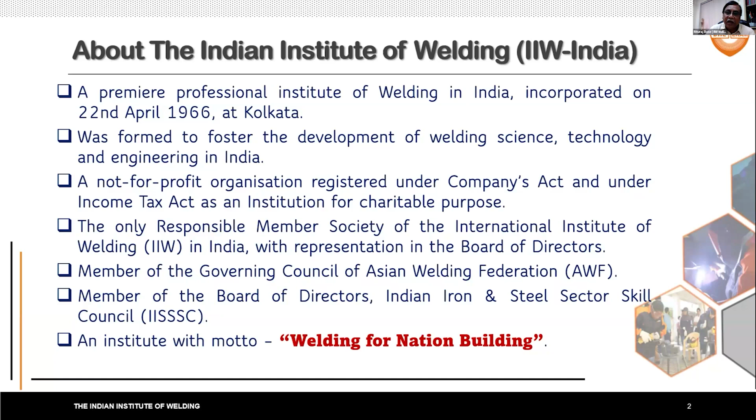This is my topic today. Before going into detail, I just want to say a few words about the Indian Institute of Welding. It's a premier professional institute incorporated in 1966 and formed to foster the development of welding science, technology, and engineering in India, a non-profit organization, and the only member society of the International Institute of Welding in India, with representation in the board of directors, member of the governing council of Asian Welding Federation, member of the board of directors, Indian Iron & Steel Sector Skill Council, etc. And our motto is welding for nation building.

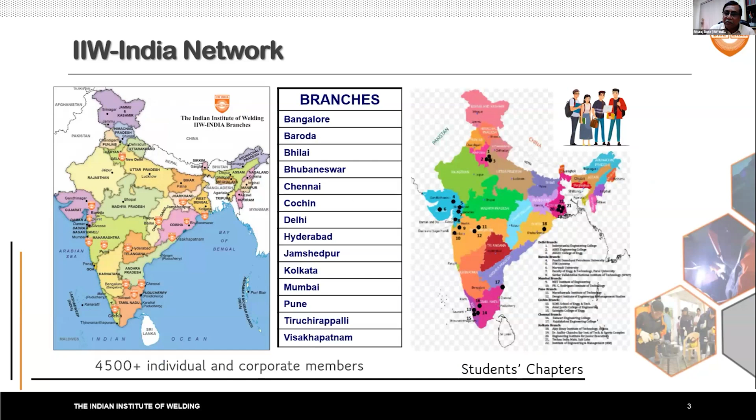Over the last 50 years, there has been a paradigm change in the welding industry. Welding technology has undergone a phenomenal change because of the efforts made in global exchange of information and research. These changes have led to adoption of higher productivity processes with consistent quality, safety, improvement of work environment, and have also contributed to raising welding technology to the level where it is today. You have seen the presentation by Mr. Shah just before, and you can understand where we are today. However, our environment is still under severe risk through welding activities, including global warming. So let us have a look at the main hazards from welding which affect our environment most.

Before that, I just want to inform. As an institute, we don't manufacture anything, but we have several curriculums for inspectors, engineers, welders, etc. And now we are focusing on our environment also. That's why our last international congress in January this year was on the theme of sustainable and green welding.

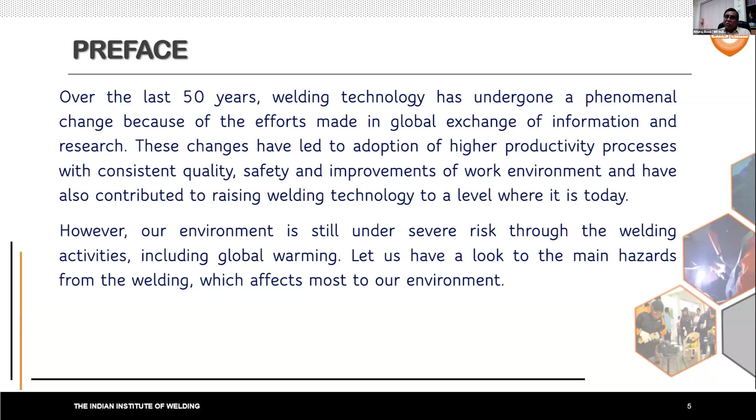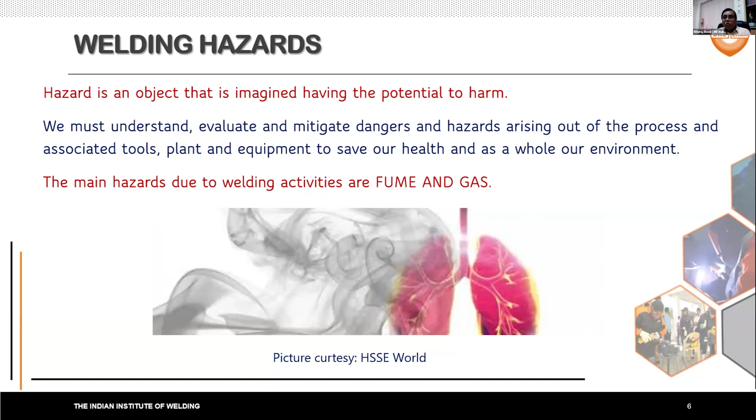Now, welding hazards: we must understand, evaluate, and mitigate dangers and hazards arising out of the process and associated tools. The main hazards due to welding activities are fume and gas. I think people know this one. And this is when we are welding in the normal, conventional way. These types of gases and fumes are easily visible, and you can see the fume particles. I just want to show you.

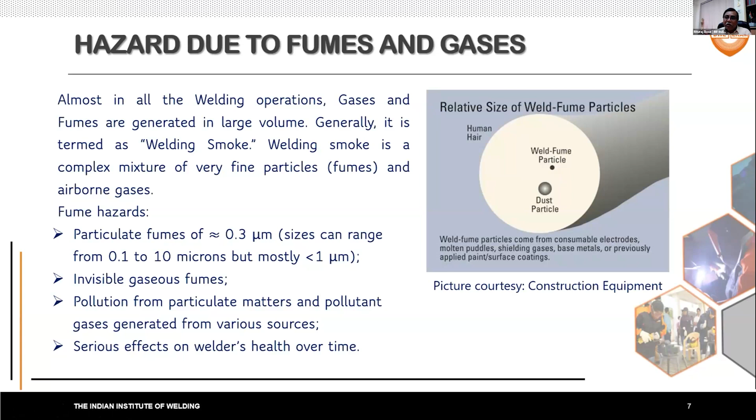You can see in this picture, if this round is our hair, this small one is the weld fume particle. It is within 0.1 to 10 microns. When welding is going on, the fumes generated are called welding smoke. You can understand how tiny this is, and it goes into our lungs and everywhere. So how dangerous this can be.

What are the sources? It can be from the parent metal, metallic fumes generated by heating, oxides formed by heat from cutting, surface treatment, chemical cleaning of surfaces, degreasing chemicals, anti-spatter sprays, surface coatings, galvanizing and other metallic coatings, paints, plastic coatings, surrounding air, formation of ozone, nitrogen oxides, carbon monoxide, other oxides, depending upon so many things.

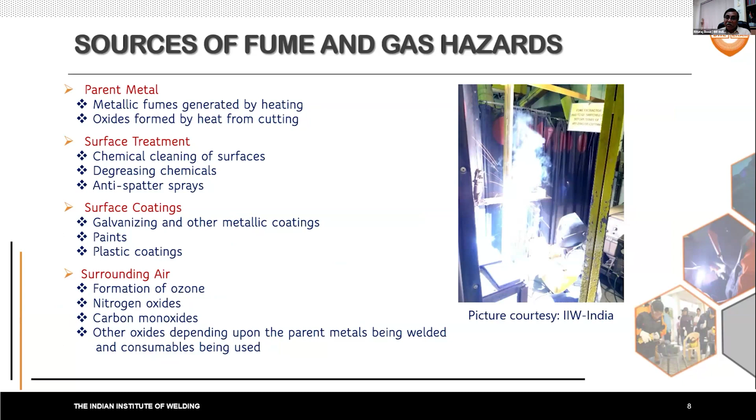And then shielding gases: carbon dioxide splits into carbon monoxide, higher level exposure of inert gas based mixtures, and lack of oxygen; continuous leakage of these gases in a covered atmosphere can put welders' lives at risk. And consumables: SMAW flux coatings, copper fumes from GMAW wires, welding fluxes. All these cause fume and gas hazards, and this always affects our environment.

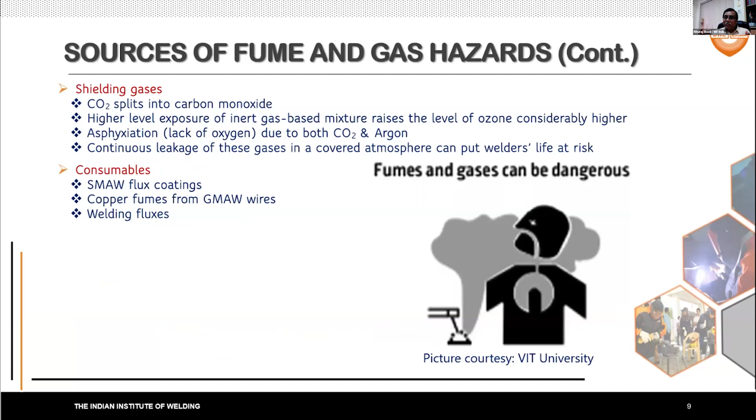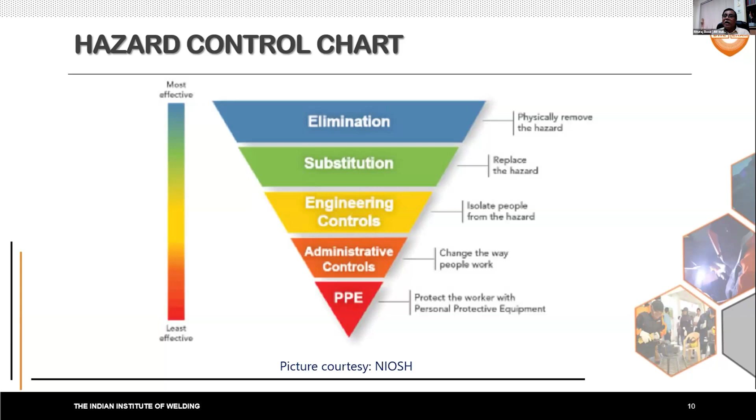Then engineering control, isolate people from the hazard. They have to design in such a way that people can be isolated from the hazards. Then substitution, where possible, replace the hazards. And finally, most effective is elimination, physically removing the hazard. The way forward is green welding, or green revolution is the only way.

So what is green welding? Welding through environment-friendly processes is called green welding in general. Different welding techniques generate different amounts and kinds of pollutants, so selection of technique has an influence on environmental impact. Two solid-state welding techniques, friction stir welding and magnetic pulse welding, create less pollution because they eliminate the need for fillers or flux and do not produce dangerous fumes.

Another solid-state technique, diffusion welding, also eliminates outgassing, but it is impractical for larger jobs. Also, magnetic pulse welding is not for larger jobs. And while talking about arc welding, we should see the possibility to use submerged arc welding to a great extent, through which production will be faster with negligible fume and gas, though positional constraints are there. That means submerged arc welding can only be done in the flat position.

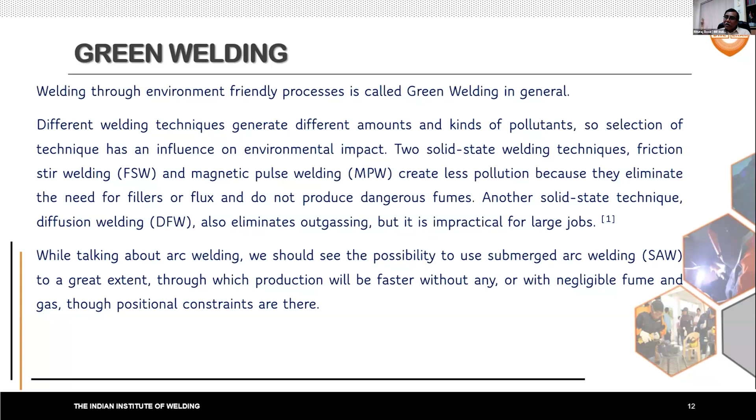Now friction stir welding is considered to be the most environment friendly and is a green technology due to its energy efficiency with high performance welding. Indeed, it's a green process that does not emit smoke or other projections and does not produce any noise, as it does not require any preparation of the surface to be welded. It does not involve any prior stripping either.

But there are constraints: it cannot be used in project sites, only in the laboratory or shop floor. But wherever possible, we have to try to use this, though it is very costly, of course. Moreover, the main advantage of friction stir welding is that it's a cold welding. More exactly, in a pasty state, the weld is made only by mechanical deformation through friction, and the bonding takes place before the metals reach their respective melting points.

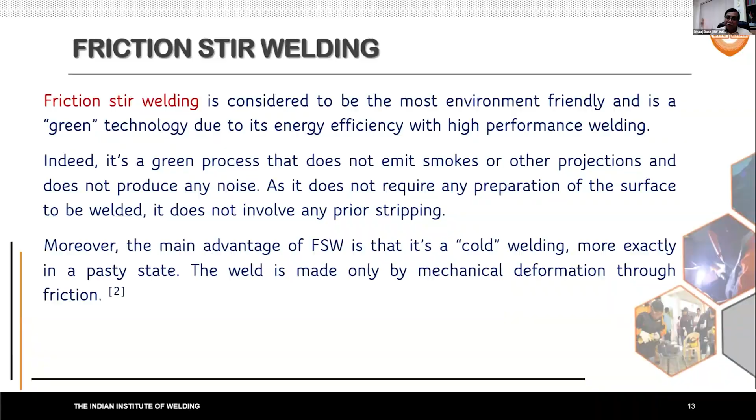Just a small video on friction stir welding.

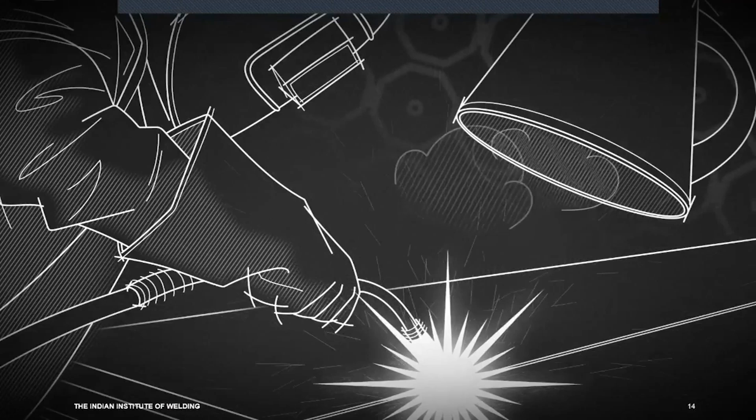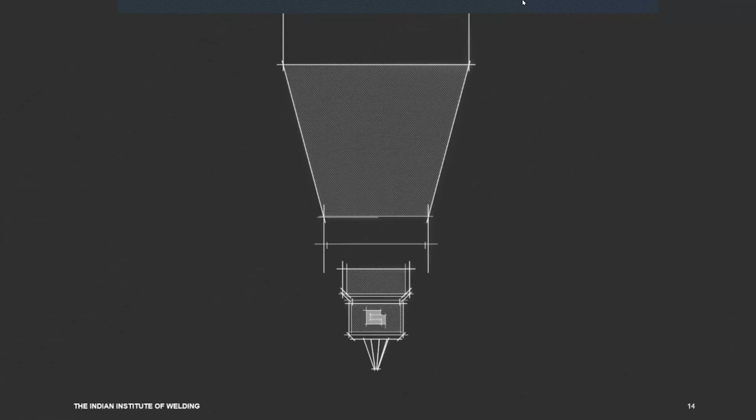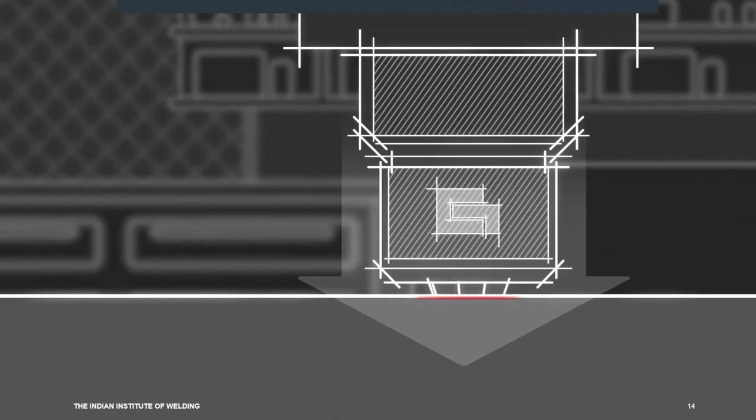Friction stir welding. How does it work? Usually during welding, sparks, smoke, and extreme heat are to be expected. Usually. But is there a welding procedure that can operate without all of that? Yes, friction stir welding. But how does it work? Friction stir welding is the optimal process for materials of the future, such as aluminum, copper, and magnesium. It joins the materials without melting. Friction stir welding aims to perfectly join two workpieces. The metals are not melted. Instead, they are stirred. In other words, mixed. In addition to stirring, friction plays an important role. This tool enables the friction. The rotating pin is pressed into the workpiece. Frictional heat is generated through pressure and rotation. Due to the heat, the material becomes deformed, even without reaching the melting point. By moving forward along the welding path, the rotating tool stirs both materials. Thus, a discrete and extremely strong joint is created. With this innovative technology, parts that are fit for the future can be produced. Light, strong, and of high quality.

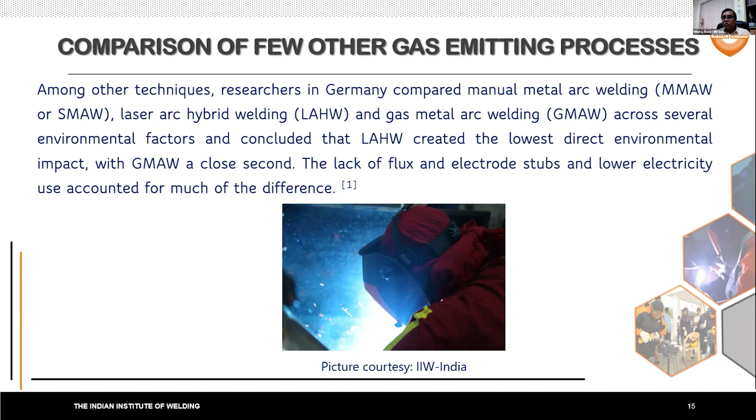Friction stir welding. So you can see the friction stir welding is not emitting any fumes. Now, a comparison of a few other gas emitting processes: in a research in Germany, they compared shielded metal arc welding or manual metal arc welding with laser arc hybrid welding and gas metal arc welding, and they found that the least fume producing is laser arc hybrid welding, then a near second is GMAW. So we can see that SMAW, or shielded metal arc welding, is a hugely fume emitting process.

The most important thing is training through a virtual welding simulator. When we give training to welders, we are using so many materials, so many electrodes, filler metals and gases, which emit these fumes. But now, if we shift to the welding simulator, virtual reality welding simulators are available nowadays in the market. Then you can save material, consumables, gas, and expert trainers, and finally we can save our environment in a big way. So cost saving, environment saving.

So we have to shift to the welding simulator for the starting of the training. Maybe after your hands are steady, then you can go for final welding with the actual things. This is a costly affair, of course, but in the long run it will give you the return on investment.

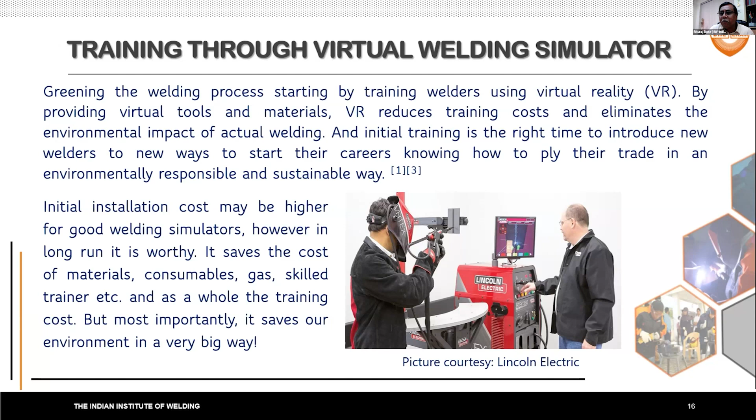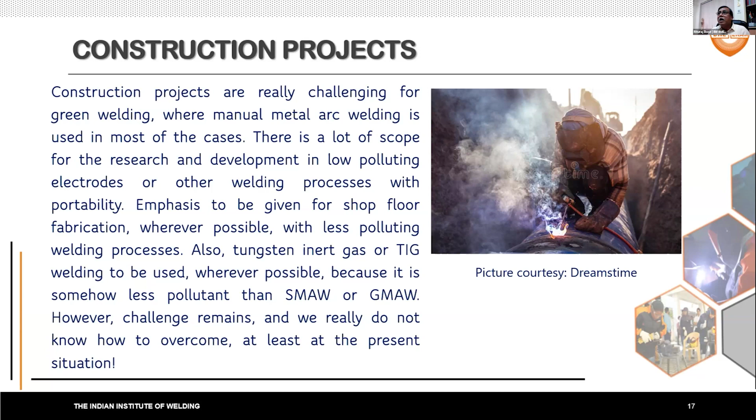And in construction projects, I am really worried about how these challenges can be overcome, because in construction projects nowadays we are using the shielded metal arc welding process, gas metal arc welding process, or gas tungsten arc welding process in a very big way. So how to overcome the challenge depends upon further R&D, and how we can use less emitting processes, because the other setups we have seen are not possible in project sites. That's the main reason.

In conclusion, to make green welding effective, we have to start training through virtual reality, and use proper equipment to extract and neutralize fumes and gases as far as possible. That means where you are welding, you have to have a fume extractor, and these fume extractors also filter the fumes. Use submerged arc welding to a great extent. Popularize the use of friction stir welding wherever possible. Research more to invent electrode, filler wire, and gas mixtures which will emit less gas and fumes.

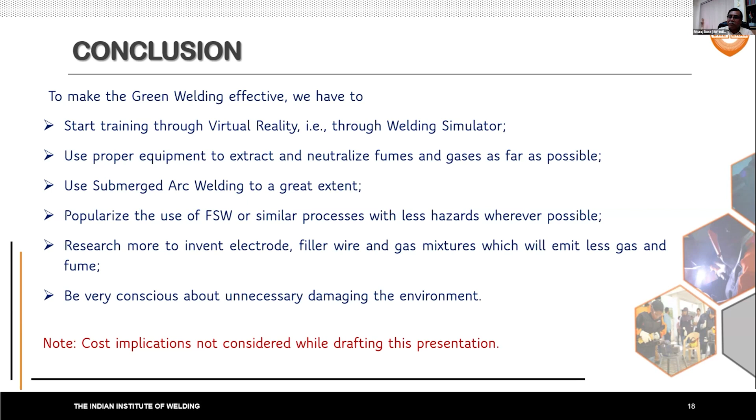Be very conscious about unnecessarily damaging the environment, and note that cost implications were not considered while drafting this presentation. And this is some acknowledgement, and thank you for your patience in hearing.